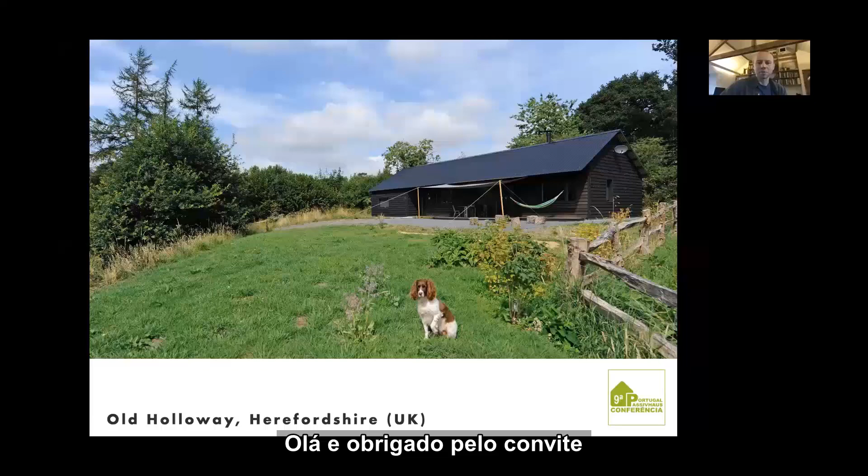I'm very happy to share our experience of designing and building Old Holloway, which is our own passive house in Herefordshire, UK. It's a project that was completed about 4 years ago, and we have lived in it since then.

Here are some basic statistics. I'm not going to go through all of them in detail, but it's a relatively small house, just under 100 square meters. Unfortunately, the form factor is not very favorable, it's about 4.6, but that's due to certain site constraints.

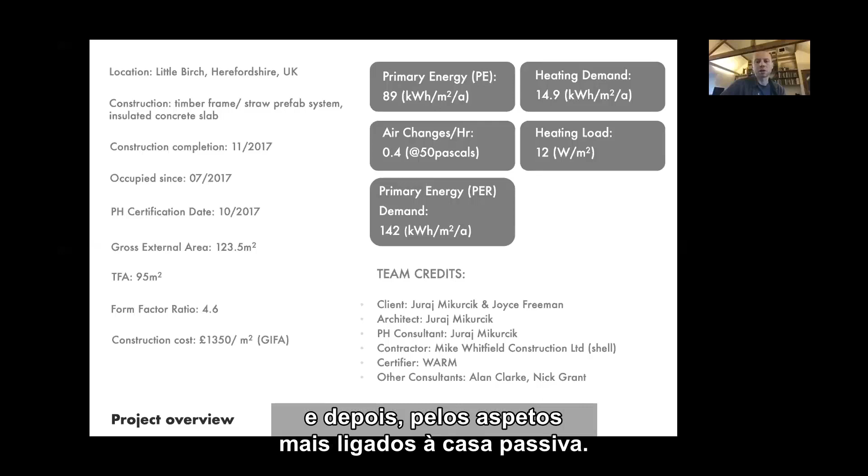I work as an architect and as a passive house designer. I was responsible for design and for the passive house side of things. The main builder was Mike Whitfield, and we also had some help from Alan Clarke, Nick Grant, and many other specialists.

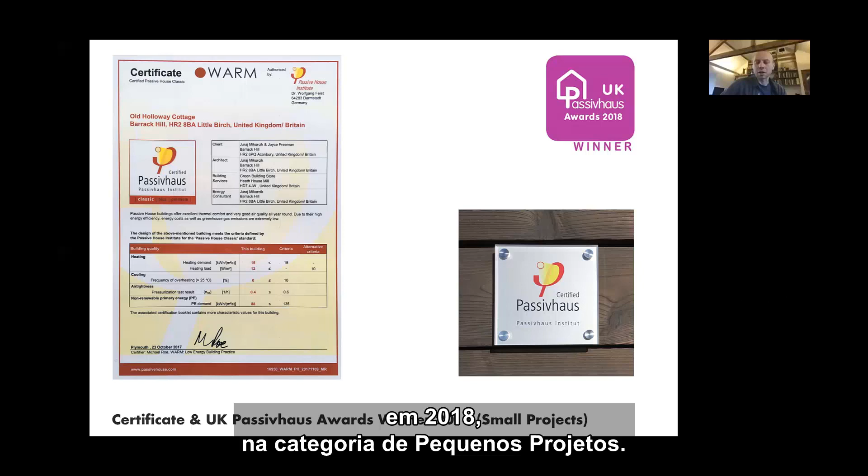Here are the passive house certificates, and the project also won the UK Passive House Trust Award in 2018 for small projects. So very briefly, it's a south-facing site.

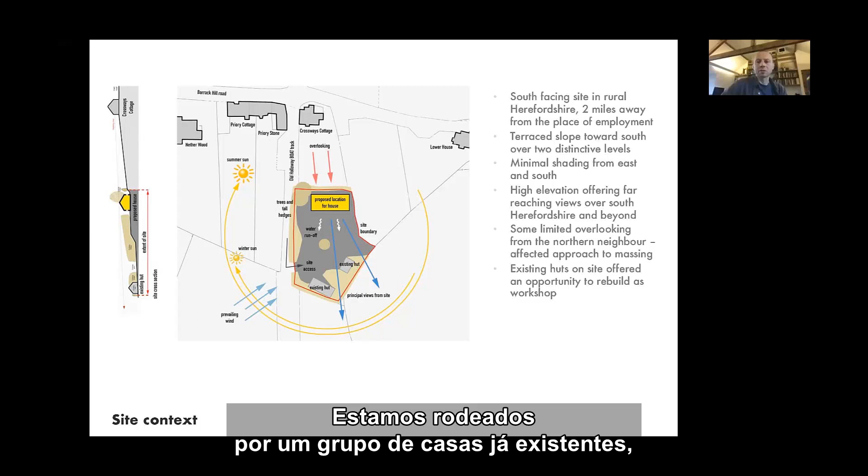It's on top of a hill. If you imagine rolling hills in Herefordshire, we are overlooking the south side of Herefordshire with far-reaching views. We're surrounded by a cluster of existing houses, but there's very little shading coming from either east or south. There's a little bit of shading on the west with some high hedging, but generally speaking it's a very open site.

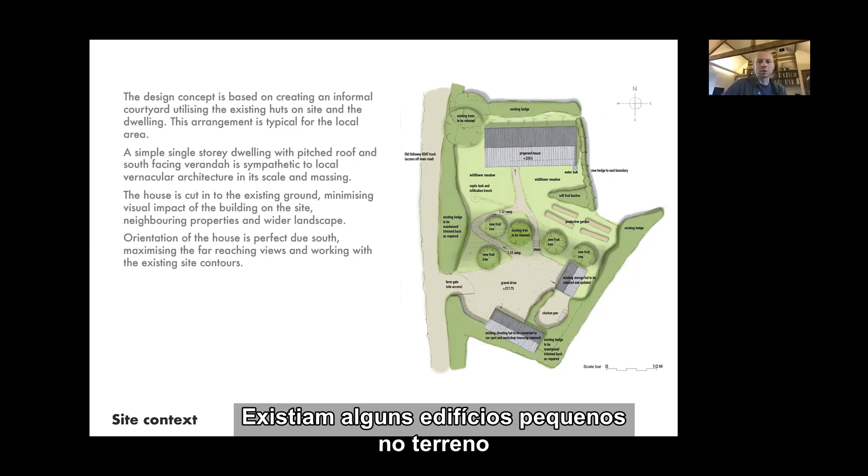There were some existing small buildings on the site before we built the house, of an agricultural nature, small huts. We decided to locate the new house at the northern part of the site to maximize the potential of the site and the views.

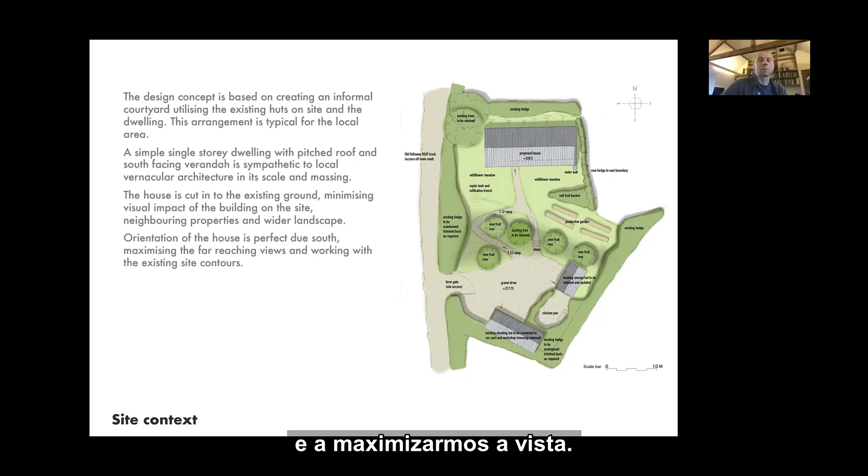We also cut the house into the ground to lower its impact on neighbors and just sit within the landscape really discreetly.

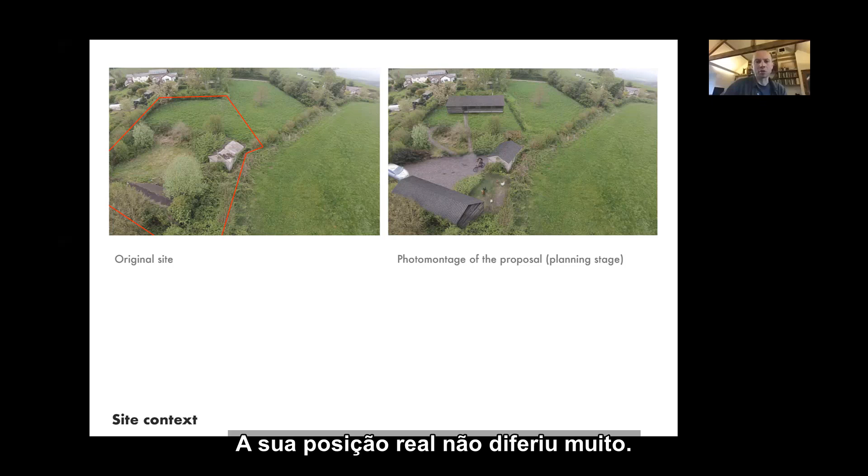Just a little bit about the design process, the massing study. We started off from a conventional two-story high house-like building with a fairly conventional pitched roof.

Then, in order to minimize the visual impact on neighbors, we dropped the massing to a single story, which meant we had to increase the footprint of the house.

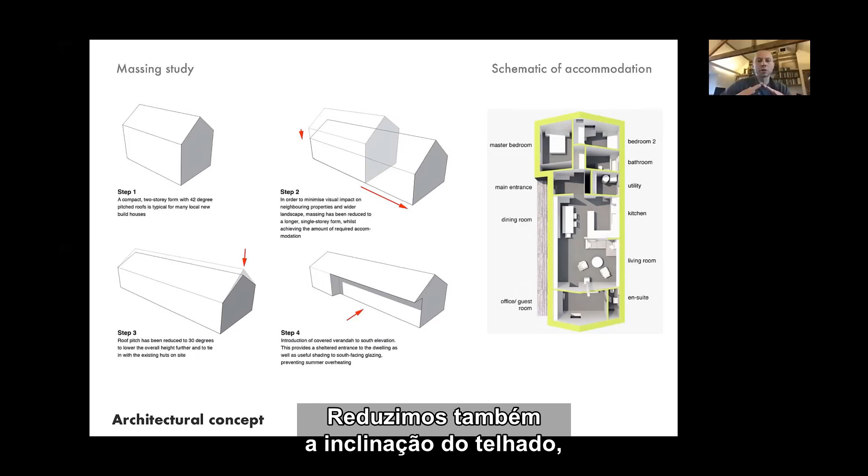We then also lowered the roof pitch further to about 30 degrees. That ties in with the roof pitches of the neighboring properties and minimizes the impact further.

And then lastly, we created this veranda on the south elevation, which provides good shading and just provides this added living space, which is external.

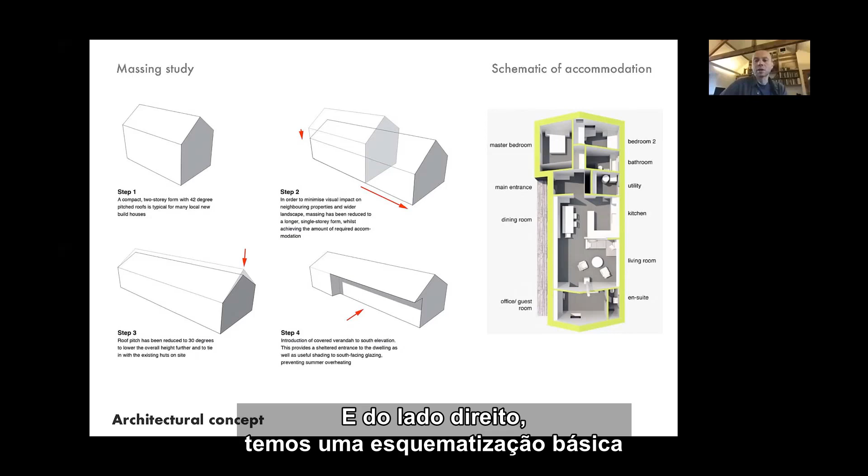On the right hand side there's a very basic schematic of how the house is designed or laid out. In the central part is very open plan accommodation - that's your kitchen, living room, and dining.

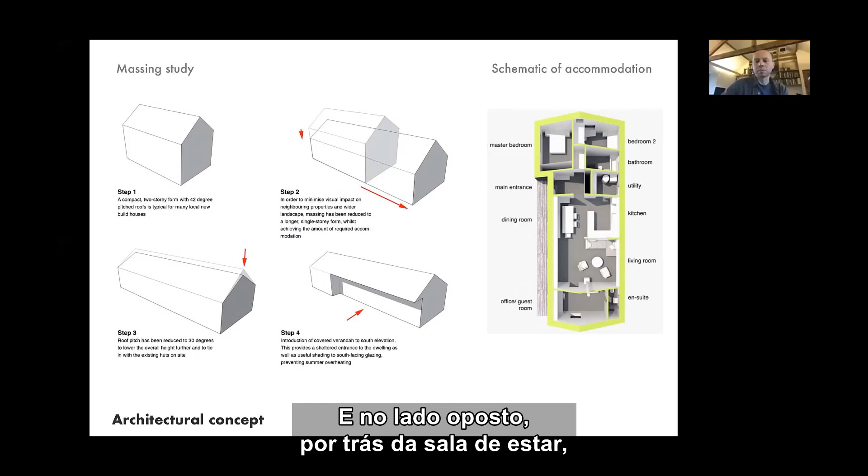At the top is the western wing with two bedrooms and the main bathroom. At the opposite end, behind the living room, there's an office or something that can double up as a spare bedroom with its own ensuite shower room.

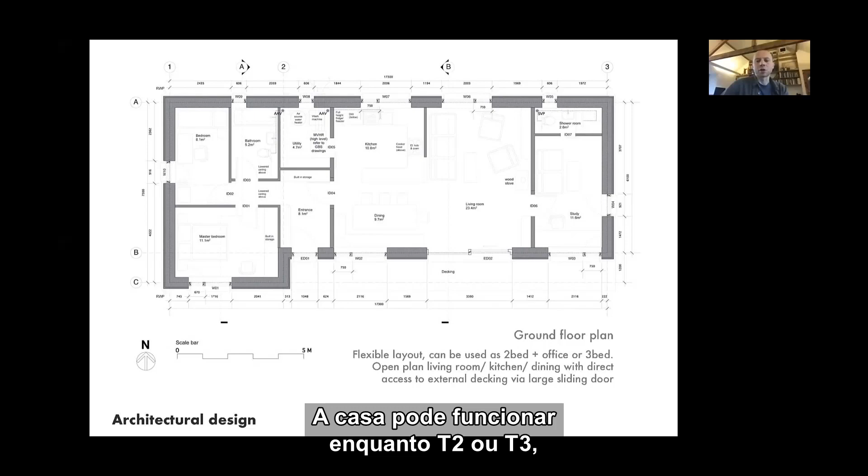Here is a larger version of the floor plan. It just shows the flexibility of the layout. The house can function as a two-bedroom or a three-bedroom house, depending on the needs of the occupants.

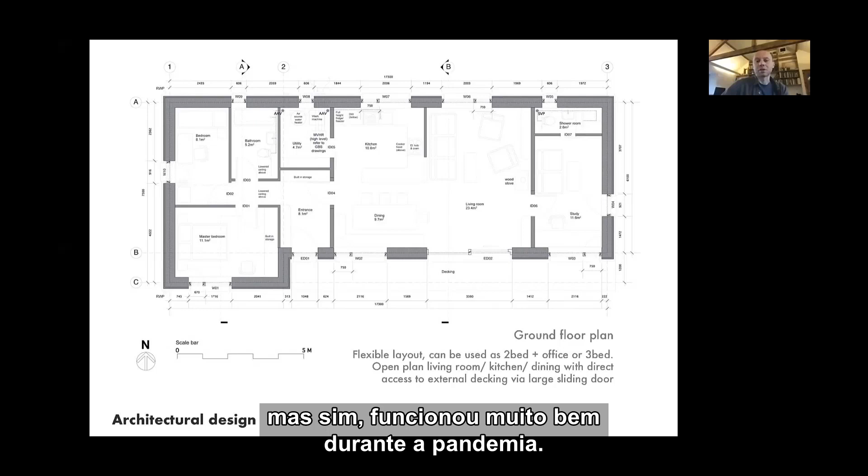I was very happy to spend the previous 18 months during lockdown in the office and worked from home - that worked really well. I'm now back in the main Architype office, which is quite nice, but yeah, it worked really well during that pandemic.

The section of the house is very simple, and we used a little trick to increase the sense of spaciousness - we opened the ceilings up, so the internal space follows the pitch of the roof, giving it a bigger volume.

From outside the house seems relatively small, but internally it really feels generous and spacious.

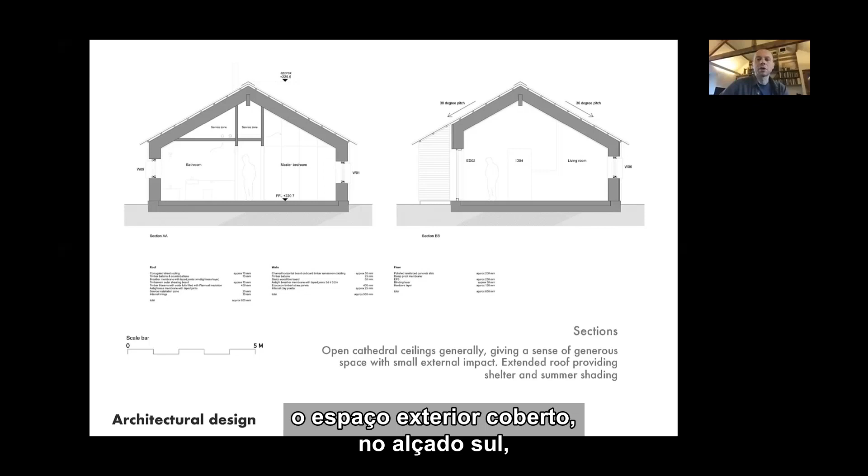On the section on the right, you can also see the covered space outside of the south elevation, that kind of veranda, which is fully shaded in summer.

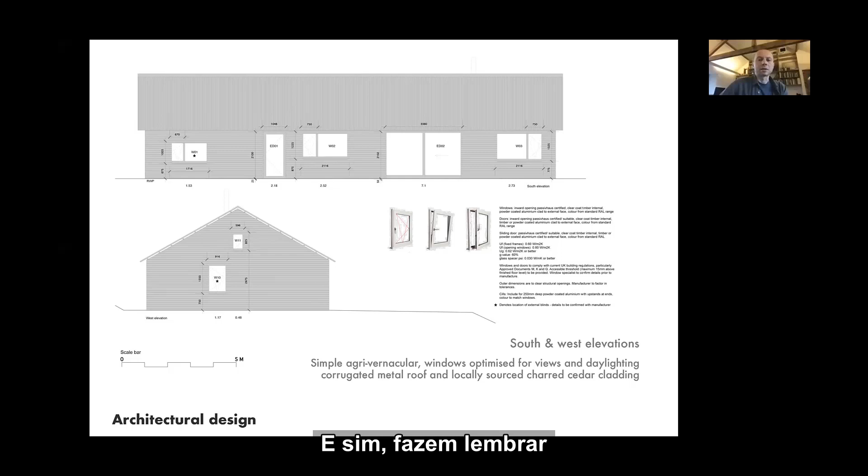In terms of elevations, we kept them deliberately very simple and used references to local vernacular, simple agricultural sheds. So the window design is also very simple. The windows are designed to optimize views and daylighting, and they sort of resemble simple agricultural buildings in the area.

In terms of materials, building materials and finishes, we kept them again very simple. So we used charred timber cladding, which is locally sourced, and a corrugated metal roof.

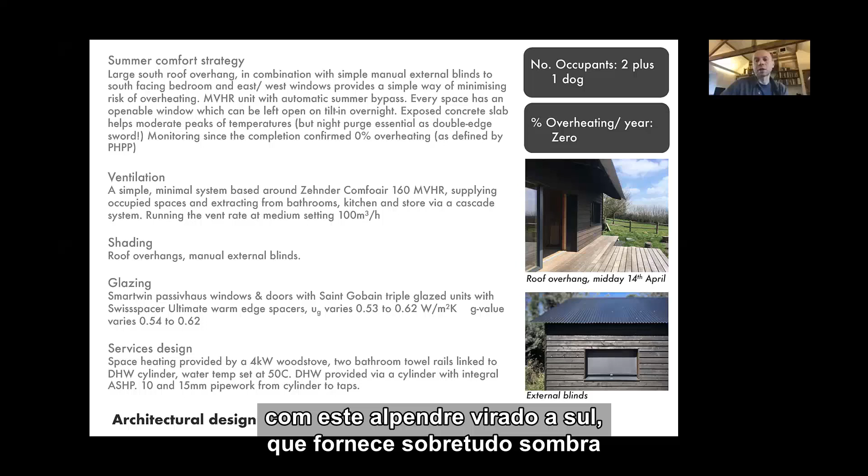Now, in terms of summer comfort, again, the design was relatively simple. We tried to design out overheating with this kind of south veranda that mainly provides the shading for the glazing facing south.

That was also complemented by some external roller blinds, which we have on 3 or 4 windows, and again, they provide good shading against the summer sun.

The MVHR unit also has an automatic summer bypass, so that helps us to keep overheating to a minimum. And also the exposed concrete slab acts as a bit of a heat battery, so it helps to smooth out the temperature peaks and troughs during heat waves.

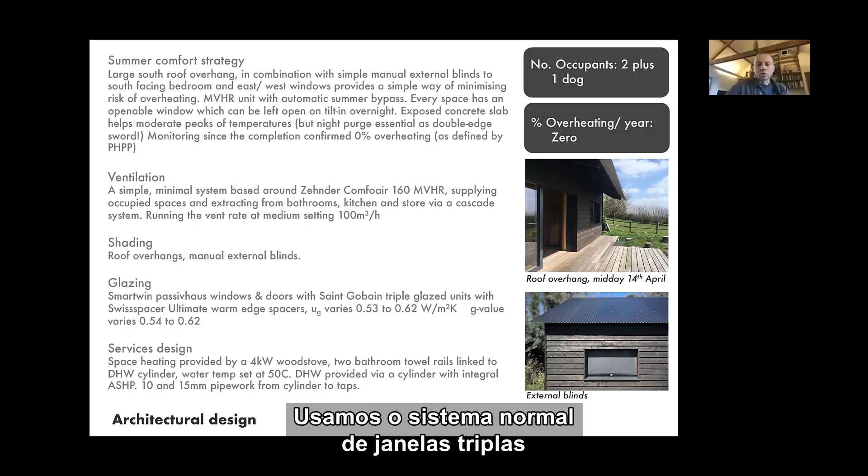In terms of ventilation, we have a very simple ventilation system based on the Zehnder ComfoAir MVHR unit. The medium rate is about 100 cubic meters per hour, and that's worked really well. The glazing is the usual kind of triple glazed system.

In terms of services design, the main space heating strategy is a wood burner. So we have a 4 kilowatt wood stove supplemented by 2 bathroom towel rails, one in each bathroom, which runs off the hot water cylinder. The hot water cylinder has an integral air source heat pump, which is a unit sitting inside a small plant room.

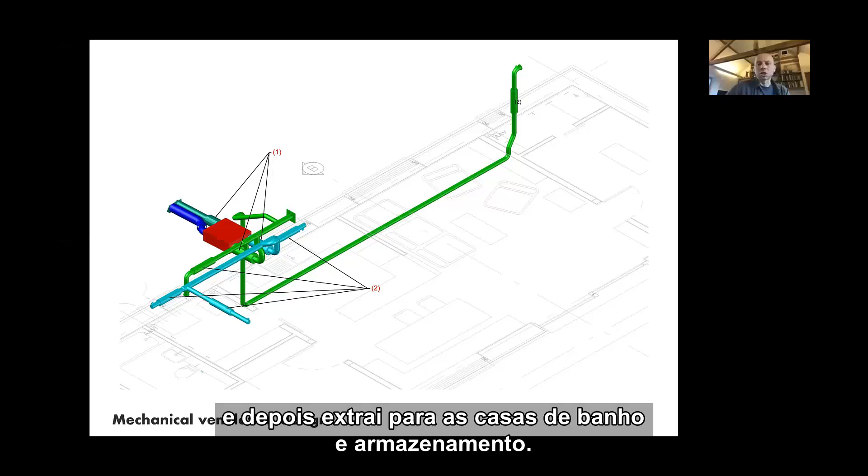Next slide is a very simple schematic of the ventilation system. We kept it really optimized and simple, so we are supplying into bedrooms and into the main living space, and then extracting through bathrooms and the store. We kept it as a very compact system.

Now we'll get into construction. So what we tried to do with the construction is use materials that have low embodied carbon and footprint.

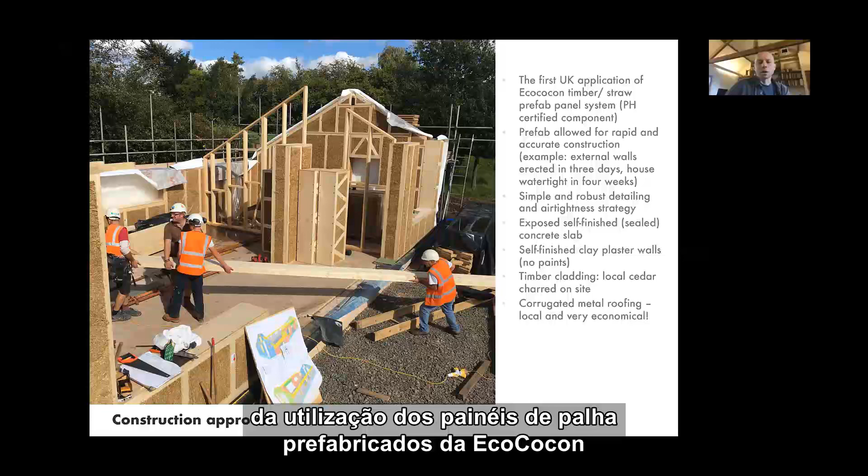This was the first example of using prefabricated straw panels by EcoCocon in the UK. It's a high performance panelized system that uses timber and straw, and it's also a certified passive house component. So we were really excited to use this as among the first customers in the UK.

And the process worked really well. All the panels are really accurate, made to measure, and work to millimeters. So the panels come together really easily, like giant Lego blocks.

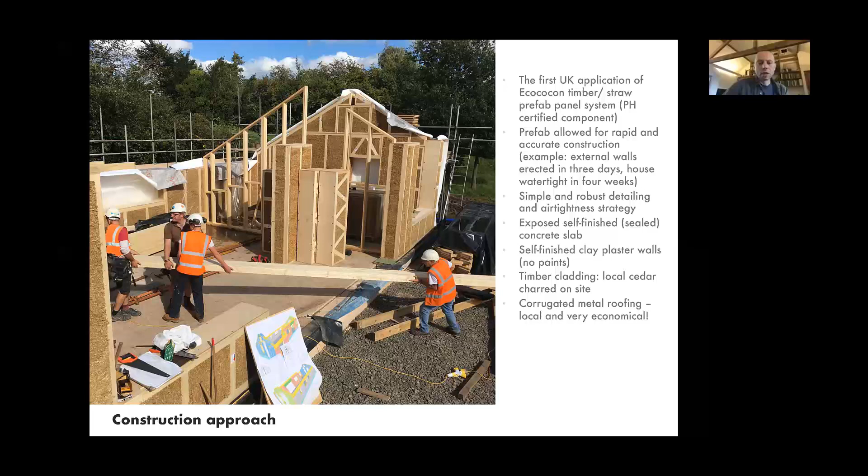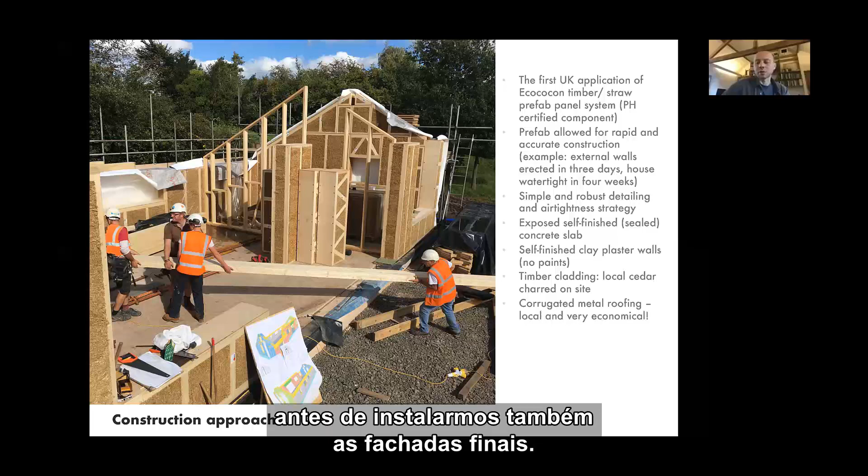We had a really simple strategy for air tightness. Basically, the walls are wrapped in an air tightness membrane from the outside, and then additional wood fiber insulation is installed before the final facade is installed as well. But we'll get on to details in a little while.

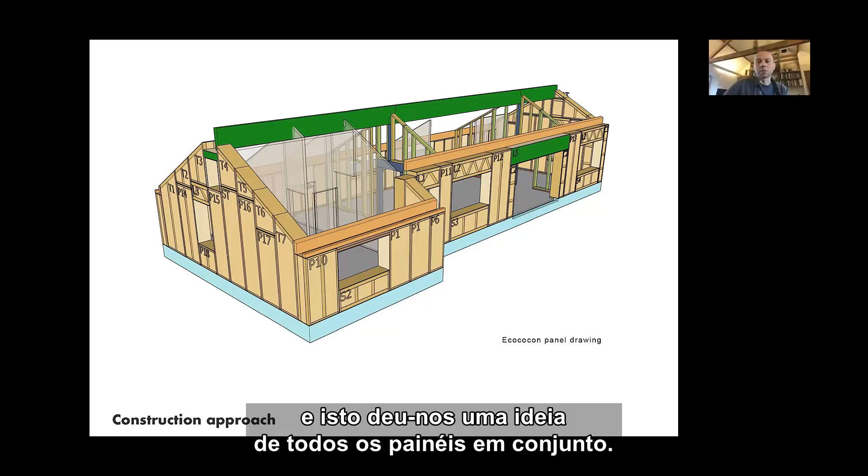This image is an example of the panel project. So basically, once the architectural design was done, the drawings were modeled and panelized by EcoCocon, and this just showed all the different panels that went together. It's a very simple and intuitive way of visualizing how the construction comes together.

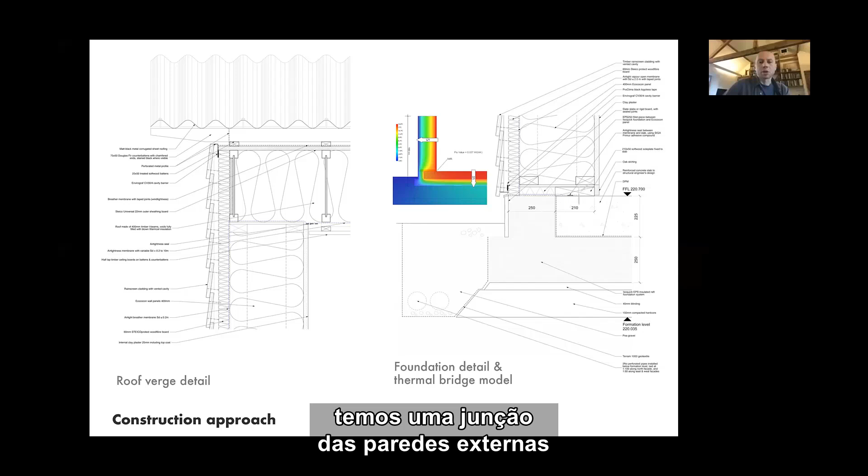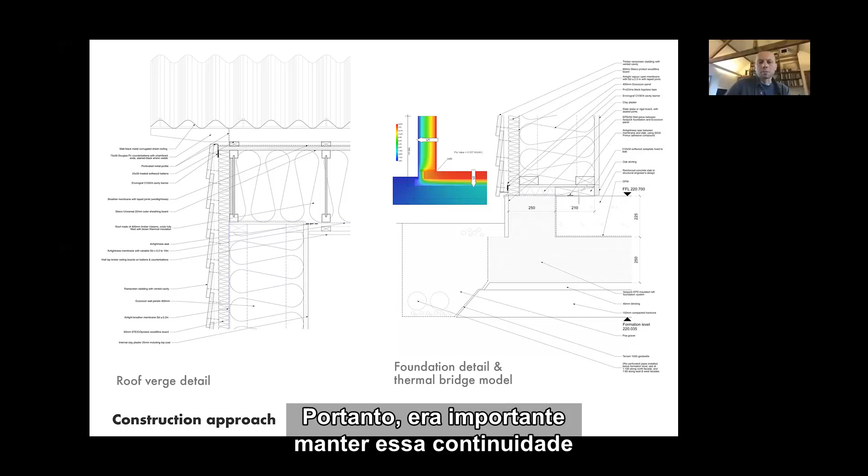Here we have a couple of examples of typical details. On the left-hand side, we have a junction of external wall and roof at the verge. It's quite interesting to see that on the external wall, the air tightness membrane was running on the outside, but then for the roof, it switched to the underside of the roof. So it was important to maintain that continuity of the air tightness layer.

For the actual roof, we used timber I-beams, and for insulation, we insulated the roofs with recycled cellulose called Warmcel, so all the gaps in the roof were fully filled.

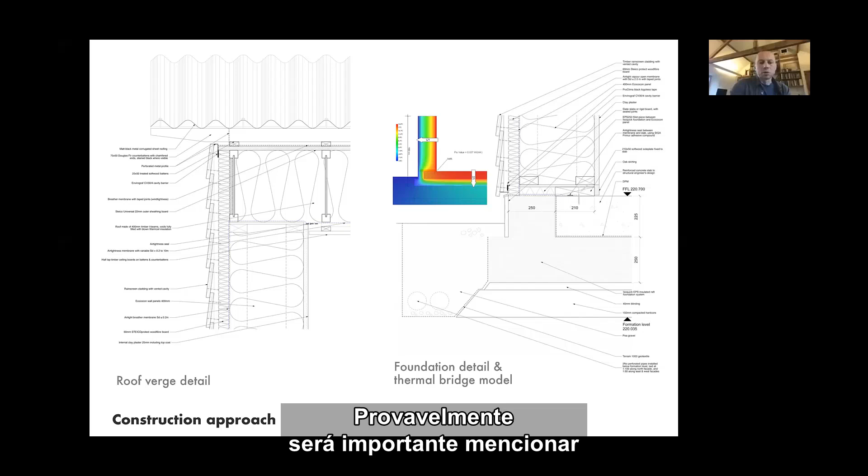It's probably important to mention the air tightness membrane for the walls is actually very vapor open with a really low SD value, so there's minimal risk of condensation in those walls.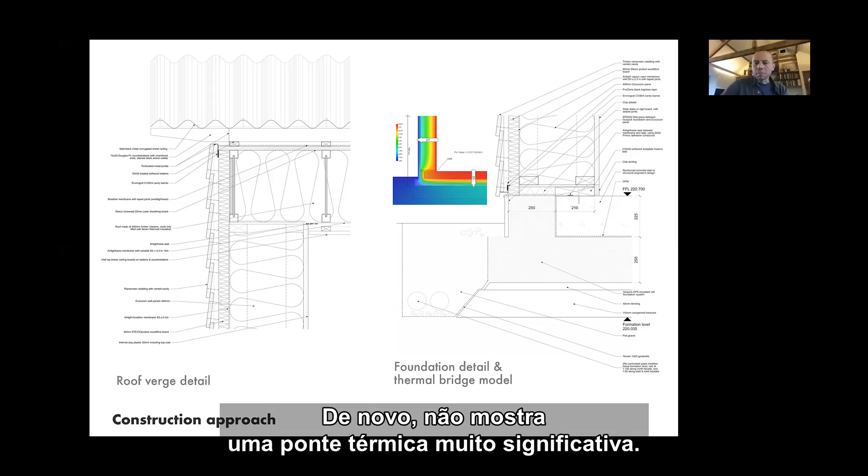Now the detail on the right-hand side shows the foundation detail. The straw panels are sitting on the edge of insulated concrete foundation, again showing no significant thermal bridging there.

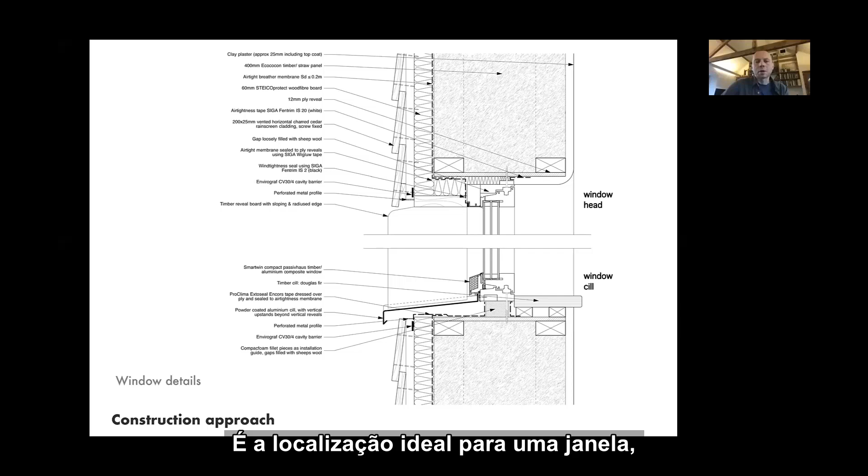Here we have a typical window installation detail, again showing how we minimized thermal bridging in that installation. We positioned the windows approximately in the middle of the wall assembly, which is the optimal location for a window from a heat loss point of view. At the head and the window jambs, we wrapped the window frames with wood fiber insulation, which minimized the heat loss even further.

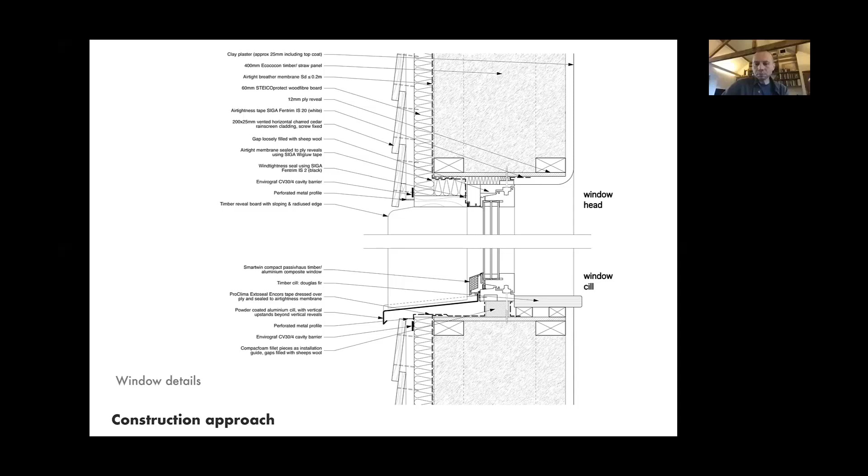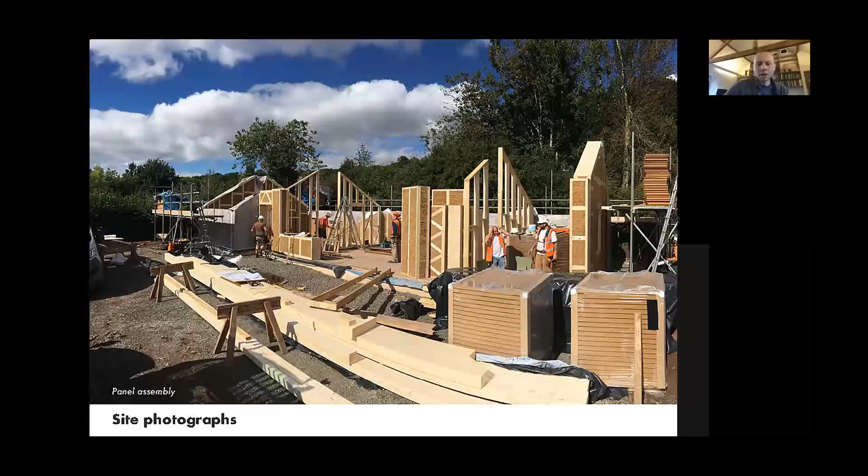Then the concrete slab provided us with a good base for building the straw panels, and the external walls went up really quickly. I think all the walls went up in 3 days, and the roof took another week or so. So for us it was really great to have the building weather tight within a short period of time.

Again, that detail was achieved with almost zero thermal bridging, but it was all part of the really detailed planning during the design stage.

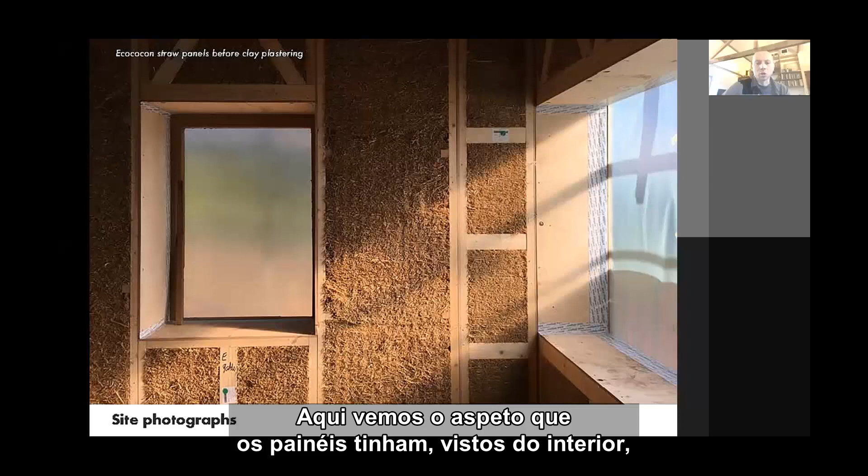Here we see how the panels looked from inside during the build. It's actually one of the great advantages of this system, that it's a very dry system. There were at that point very few wet trades, so it was really nice to work in that environment during construction.

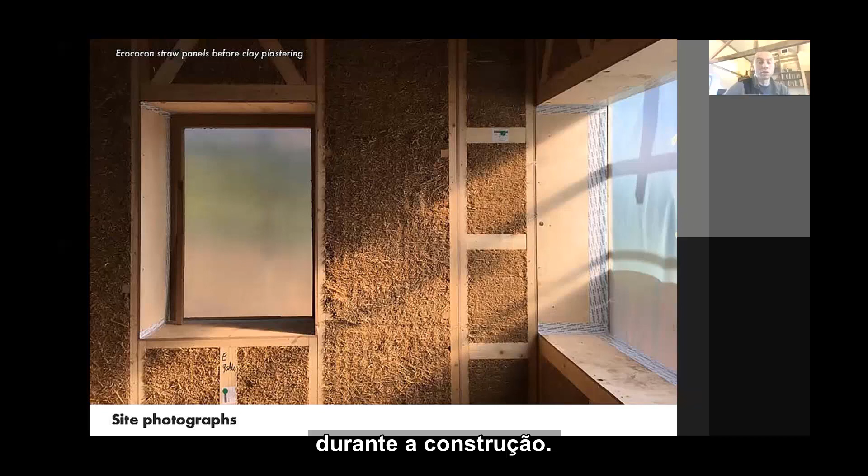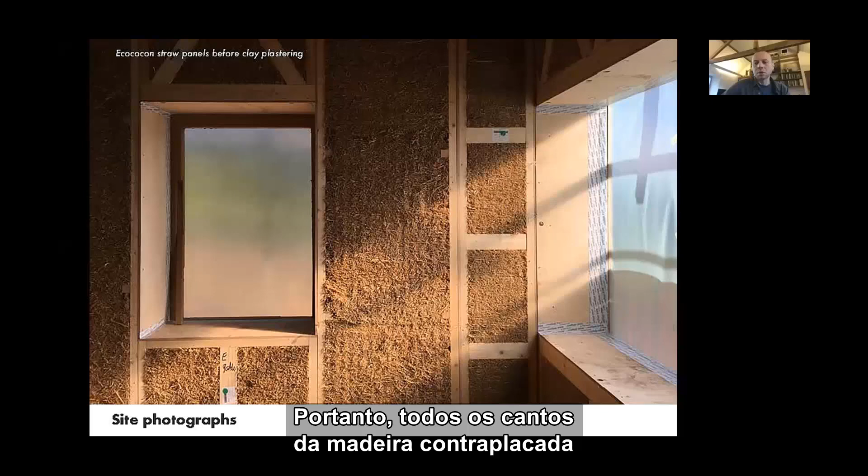On this photo, you see the plywood boards around the window openings, and those were also part of the air tightness strategy. All the corners in the plywood were taped before the windows were installed.

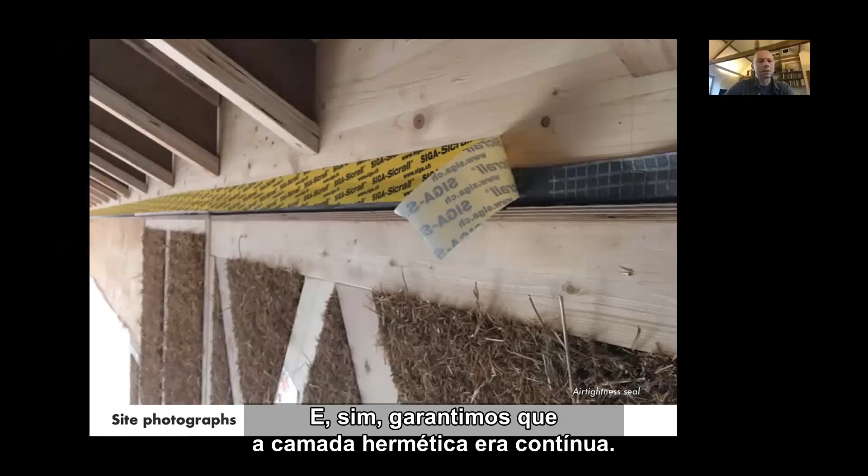This shows a junction between walls and the roof, where the membrane from outside is switched to the inside, then taped onto a glulam wall plate, and later a membrane was applied to the underside of the I-beams. So we made sure that the air tightness layer is continuous.

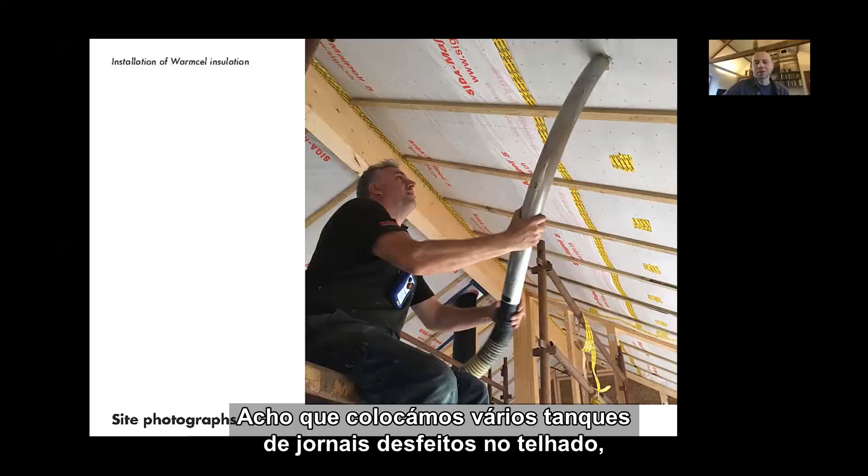This is just some pre-taping of windows before installation, and insulating the roofs with recycled paper. That was quite fun, I think we had many tons of shredded newspaper in the roof, which is keeping us nice and cozy.

Obviously, as on every passive house project, we had to do a couple of air tightness tests, and we passed quite comfortably. This is the first air test we did once we had all the windows in, and all the air tightness was taped up and achieved. The first test achieved about 0.4 air changes per hour.

You can see in the picture a very small fan that was installed within the window, rather than usually a larger fan being used in the door.

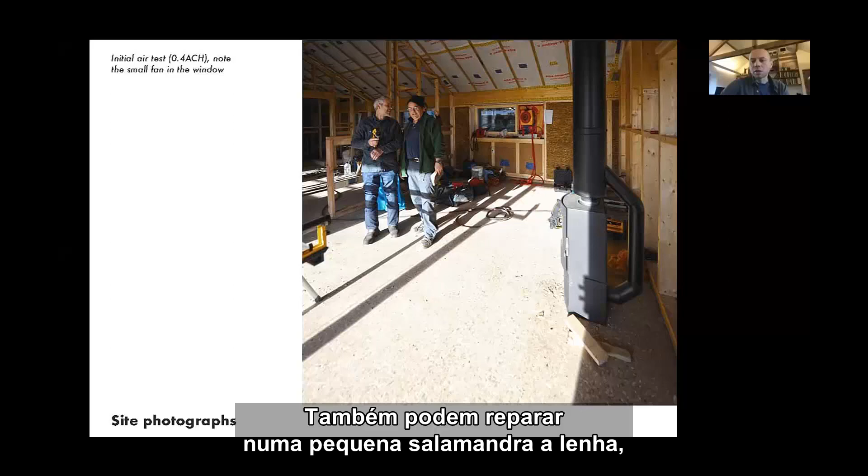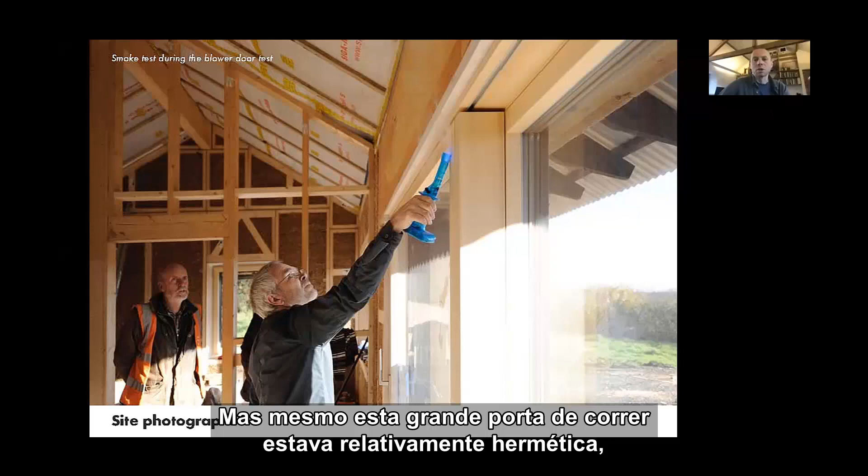You'll also notice a small wood stove here in the corner. That was one of the weak points in terms of air tightness, because inherently it is a penetration through the air tightness envelope. But even the large sliding door was relatively airtight, so there were no major air leaks through that, as we've shown here with a smoke test.

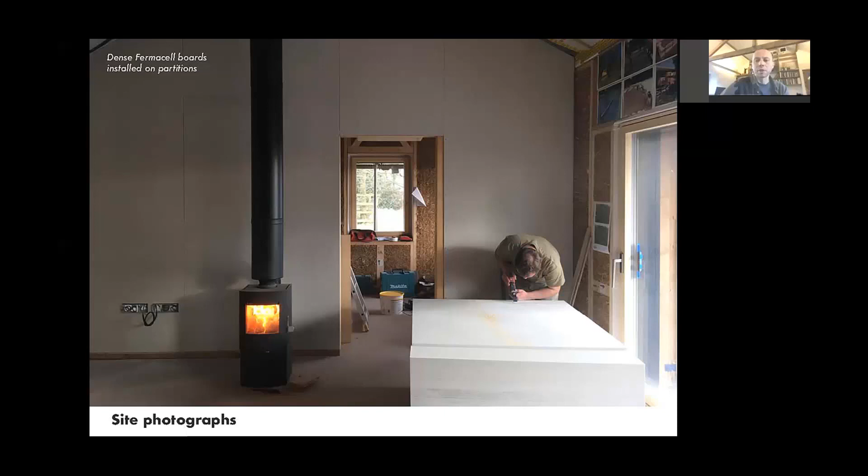Then we carried on with installation of internal partitions. We added really dense plasterboards called Fermacell, which helped us achieve more thermal mass in the house. Obviously, straw being quite lightweight, we tried to put a bit more density into the construction.

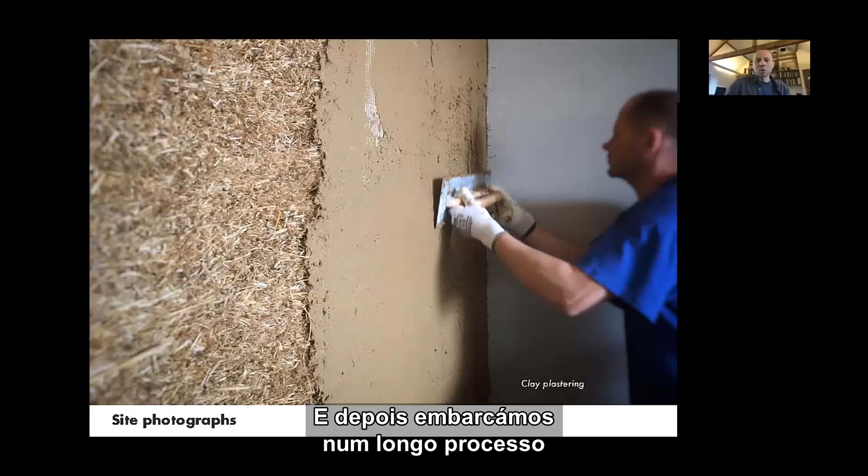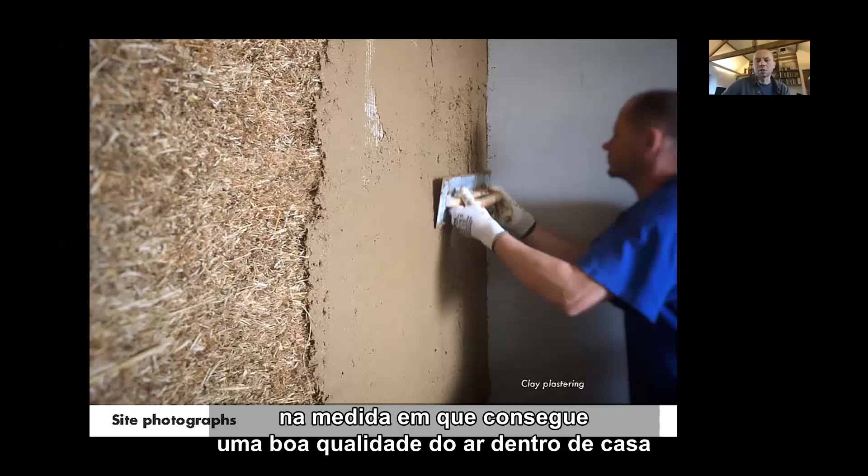Then we embarked upon a long process of clay plastering all the straw panels. Roman from Slovakia was an excellent plasterer, and we spent about 7 weeks applying several layers of clay plaster onto the straw walls. This really provided a great finish that's low toxicity, very natural, and doesn't need painting. It's a great combination with straw in terms of achieving good air quality inside, and this feeling of solidity as well.

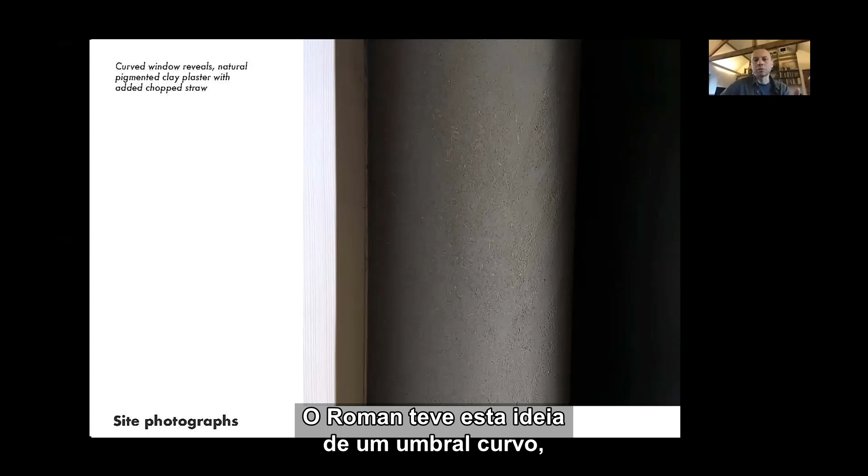And this is a finished corner. Roman came up with this idea of a curved reveal, which really gives it a nice sculptural form, and the finished product there.

Then we obviously had to commission the ventilation. Nick Grant and Alan Clarke came around to commission the ventilation system, which was great, and it's been running really well since then.

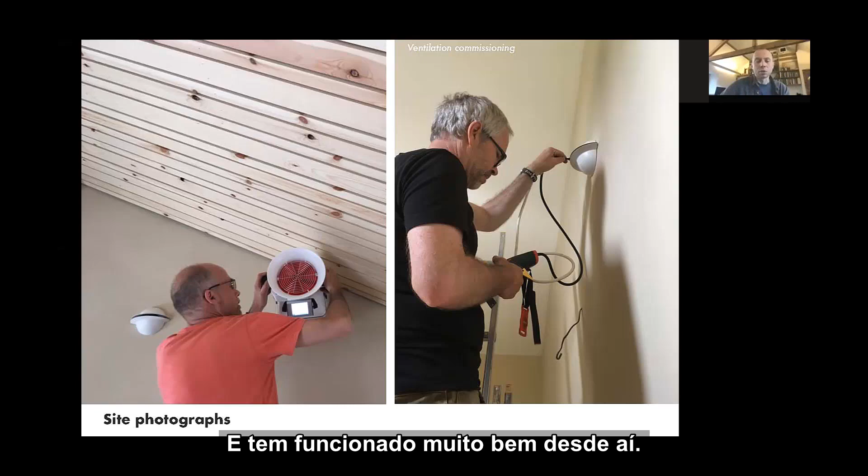We also had fun charring the cedar cladding on site, although it took quite a long time to do. I think the final effect was worth it.

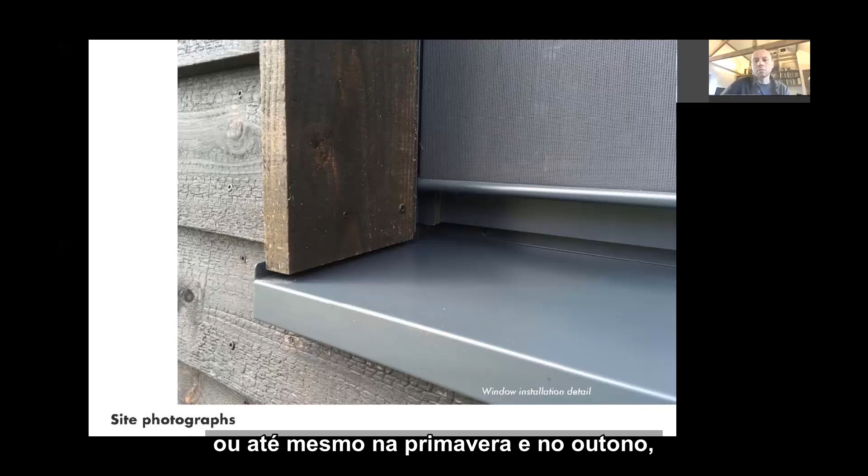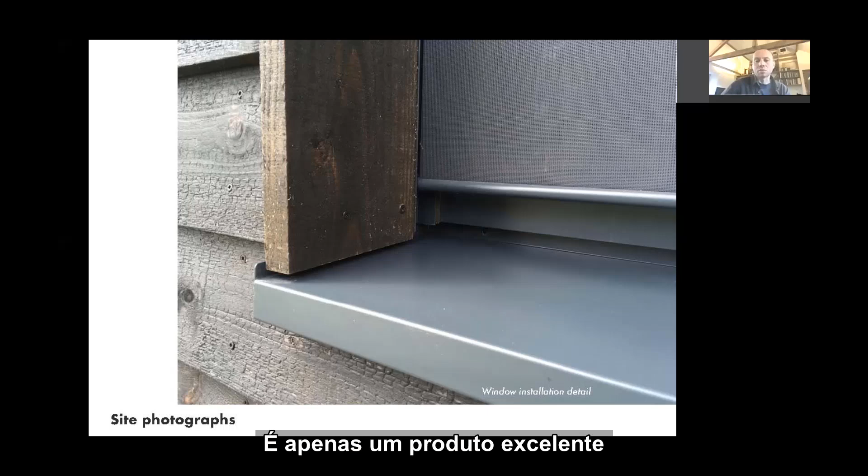Here we see a large scale detail of a typical window installation from the outside, and this includes an external roller blind, which we use during the summer months, or even spring and autumn when it's really sunny. The great advantage is that it also acts as a bit of an insect screen, so we can leave the window open behind it. Yeah, it's just a really good product and good concept.

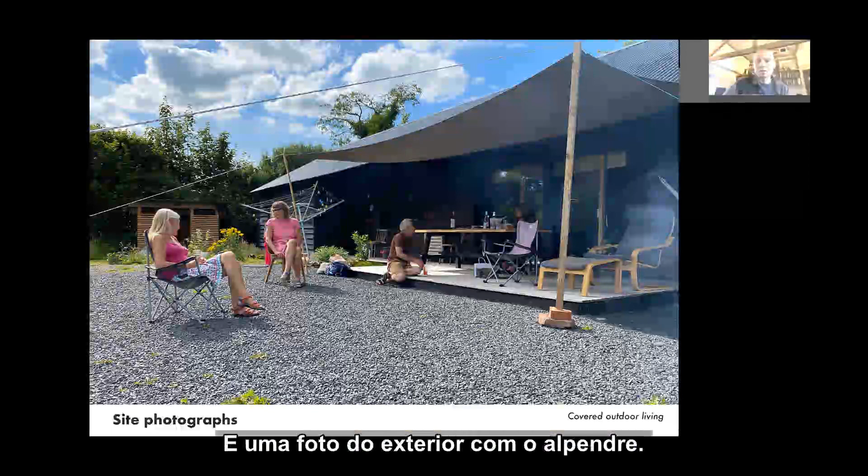Just a photo of the exterior of the veranda. Sometimes in summer we extend the covered space with this kind of external sail, and that just provides an extra bit of shading for the timber decking. It doesn't provide any more shading to the interior, but it's just nice to be sitting outside with friends.

Just a few more interior shots.

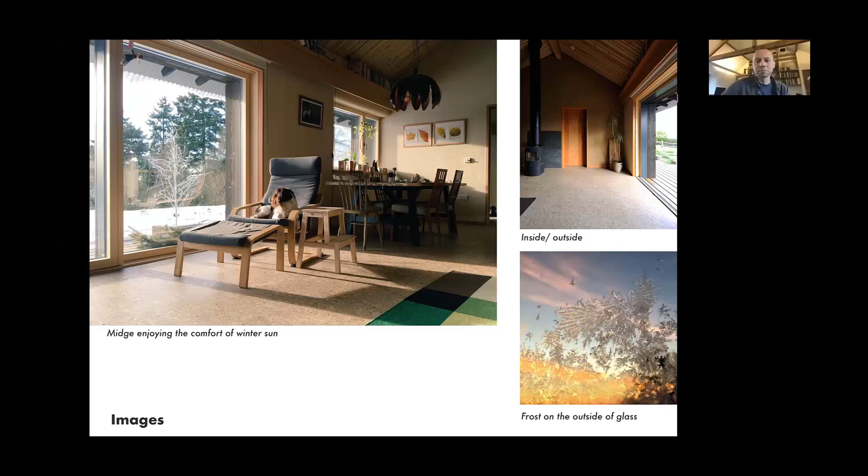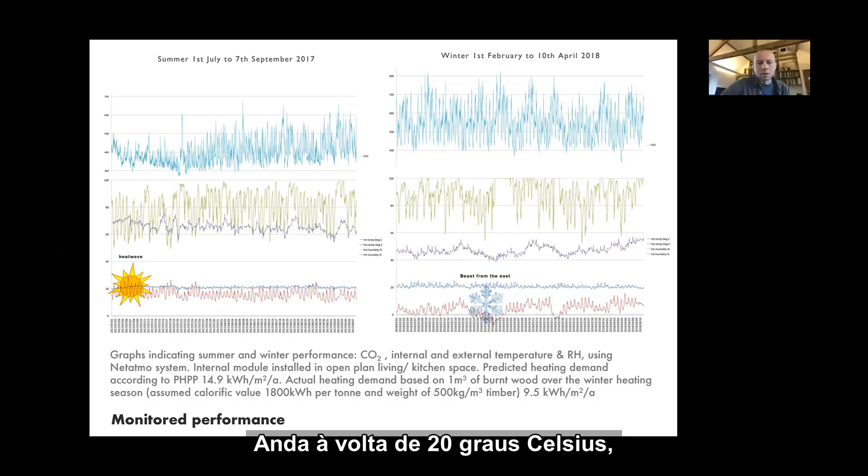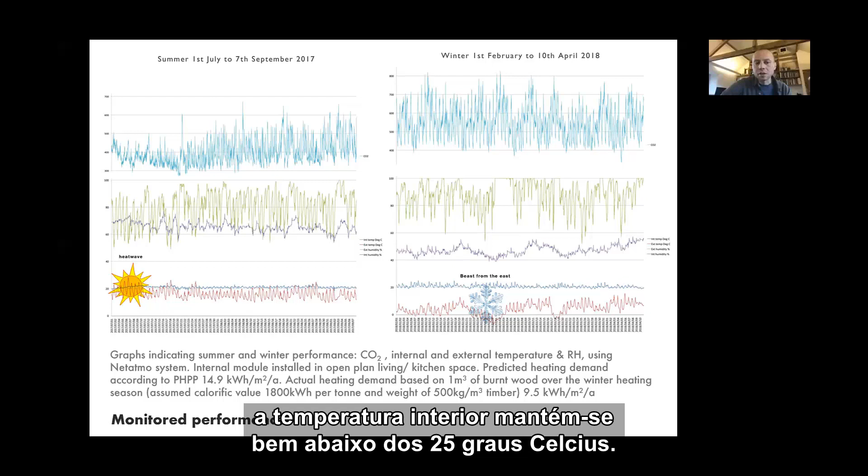The graph on the left shows the summertime. The graph at the bottom is the interior temperature, hovering around 20 degrees C even during the heat waves. The blue line is the inside temperature, the red line is the external temperature. So even with temperatures nearing 30 degrees, the inside stayed well below 25 degrees C.

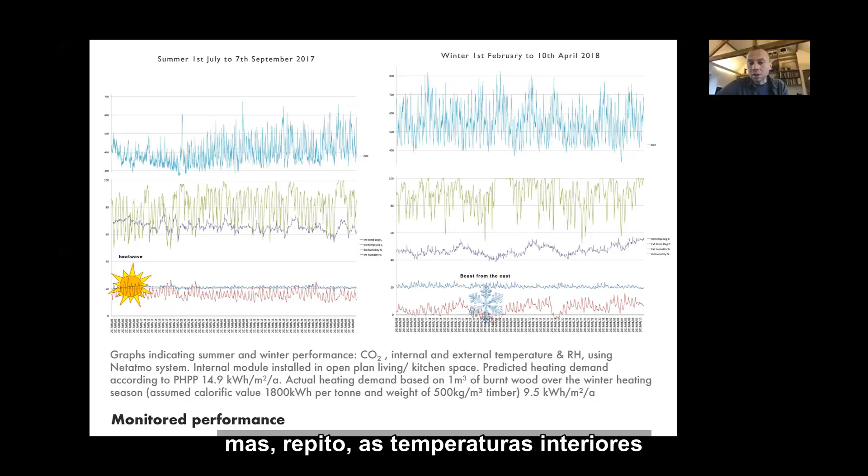Then the graphs on the right-hand side are from wintertime during the Beast from the East. Again, the red line is the external temperature. For a period of about a week or 10 days, it went well below zero, which is quite unusual for the UK. But again, the inside temperatures barely touched or changed during that period, fluctuating just above 20.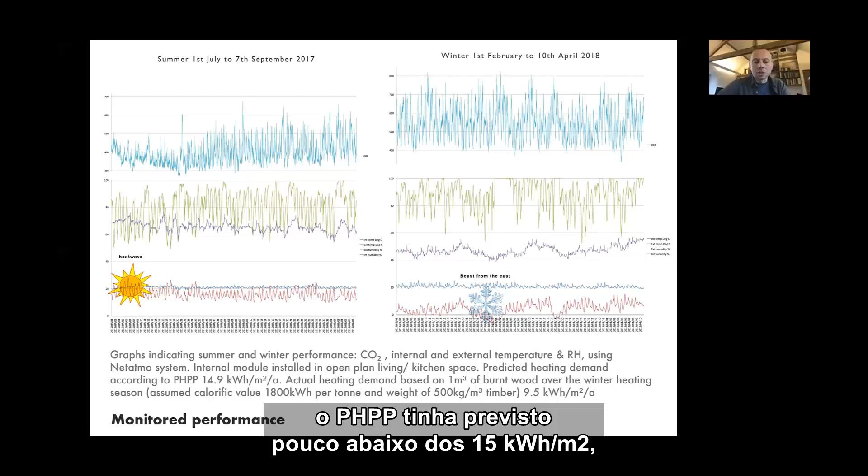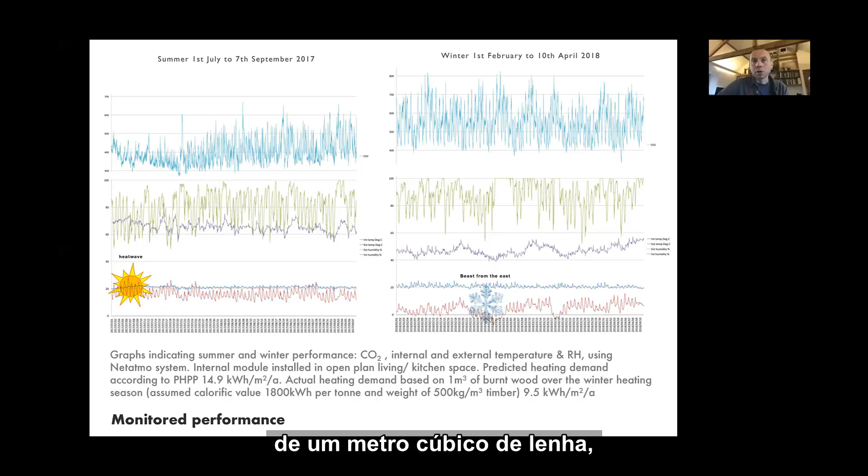In terms of the heating demand, the PHPP predicted just under 15, but the actual heating demand, based on the wood we burned over that really cold winter, came to about 9.5 or around 10 kilowatt hours per square meter. Just for comparison, last winter we burned a third of a cubic meter of wood, so it would be even lower than that.

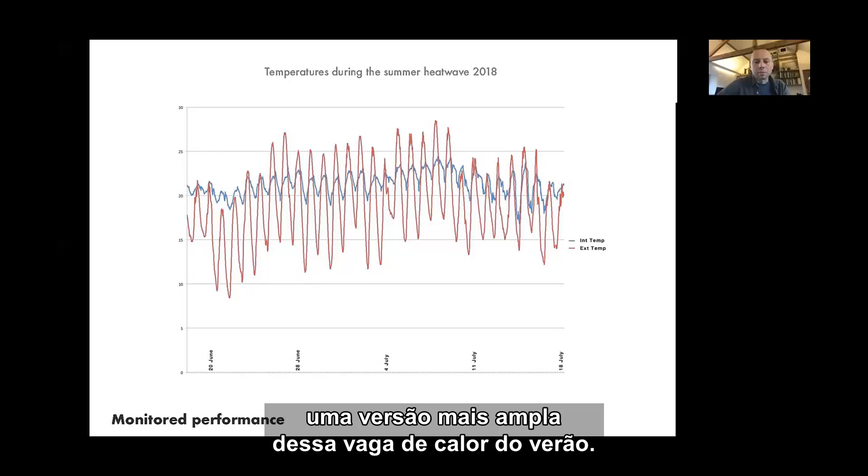I'll come on to the question of the wood burner in a short while. This shows a larger version of that summer heat wave, again showing the external temperature in red and internal temperature in blue. So, very stable conditions.

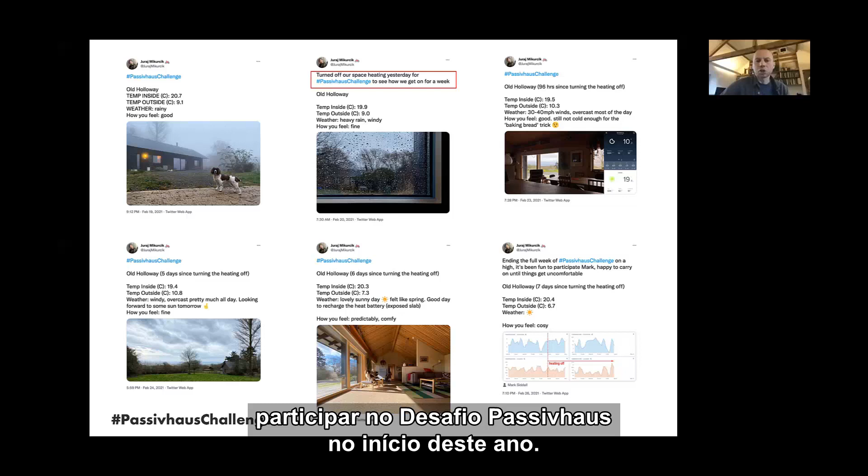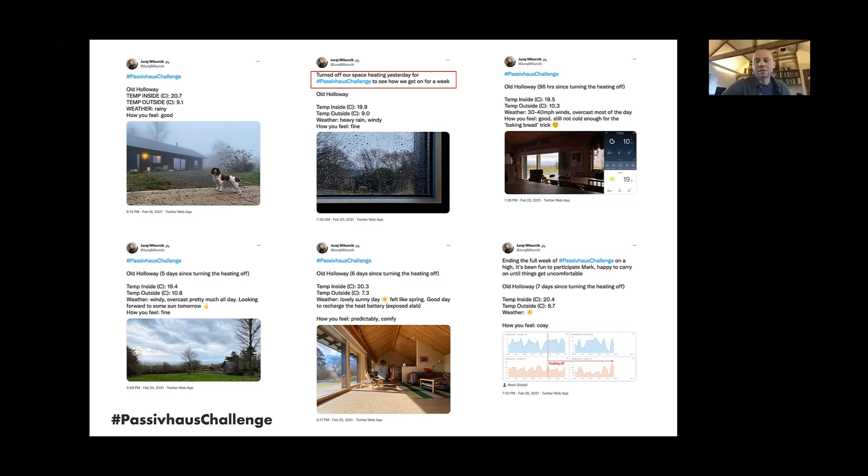It was also very fun to join the Passivhaus Challenge earlier this year. Mark Siddall from the UK on Twitter started this fun little activity, asking residents of passive houses to stop the heating for a week and see what happens. A few people on Twitter joined this campaign, and it was quite fun to see how the house would actually perform over that time. In the end, it was really easy to stay there without heating for a week. It started on the 19th of February, when we turned the heating off.

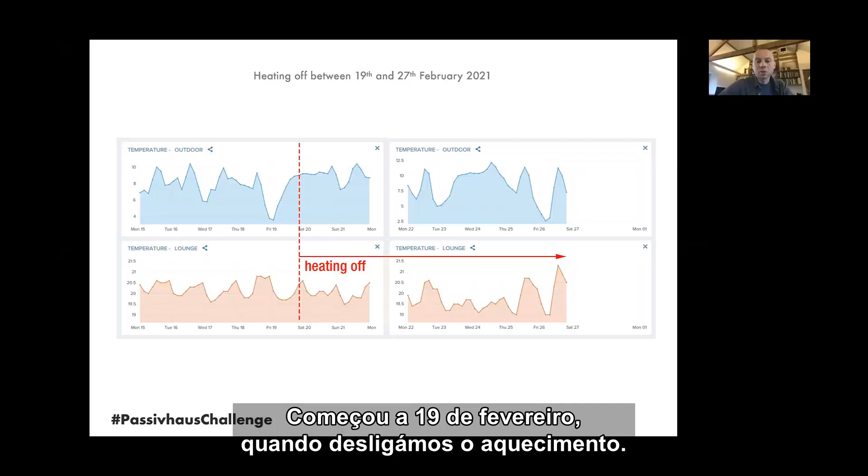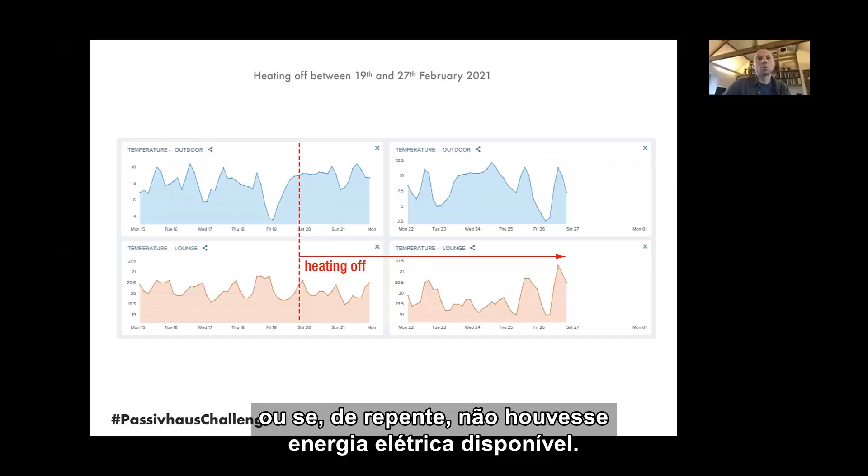Outdoor temperature was relatively mild, anywhere between about 4 and 10 degrees outside, but inside temperature hovered between about 19 and 21. So again, it just showed that Passive House is very resilient - in terms of power cuts, if suddenly there was no power available, we'd probably still be okay for a while.

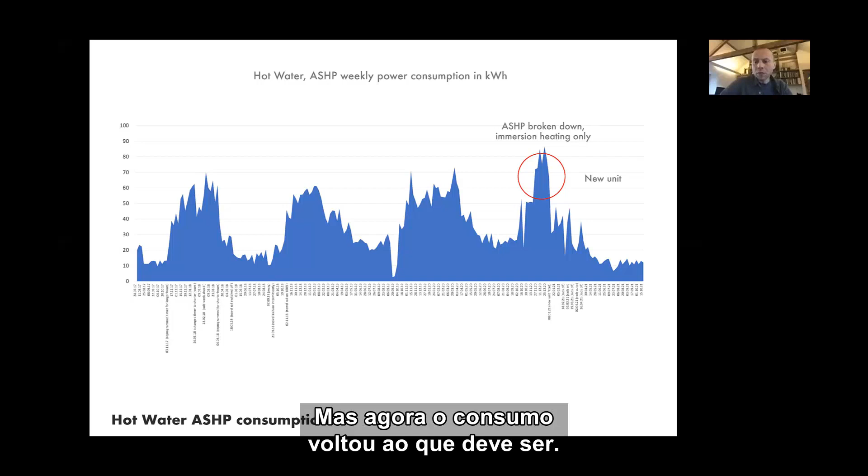Our original air source heat pump did malfunction last winter, so it had to be replaced. As you can see, for a short while we just used the immersion heater, and the consumption went really high. But now the consumption is back to where it should be - around about 10 or 12 kilowatt hours a week, which is really good.

Here are just a few thermal images, trying to find any cold spots. But as you can see, the hottest and coldest things are things like the television and a cold bottle of beer in the house. So very happy with how the system and the building has been constructed, with almost no significant thermal bridges.

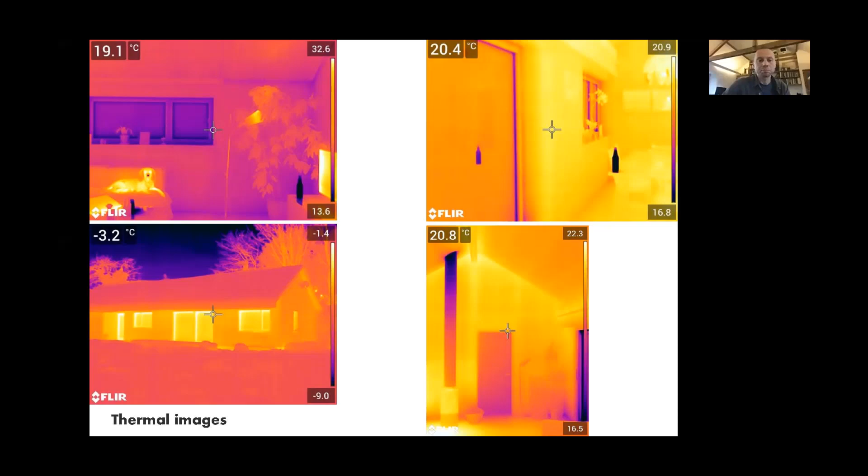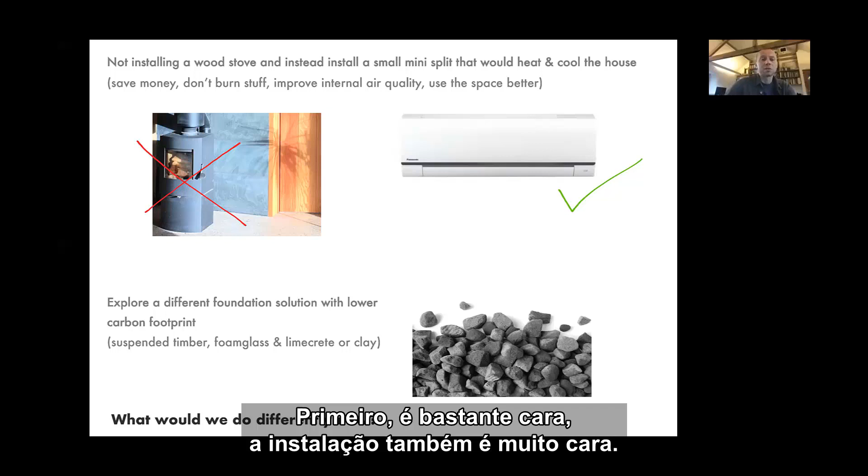João, you asked me to include things that we would probably do differently. Now we've lived in the house for 4 years, I think it's become clear that the wood burner is probably not ideal for us. It's quite expensive - it was quite expensive to put in - and we don't actually use it all that much.

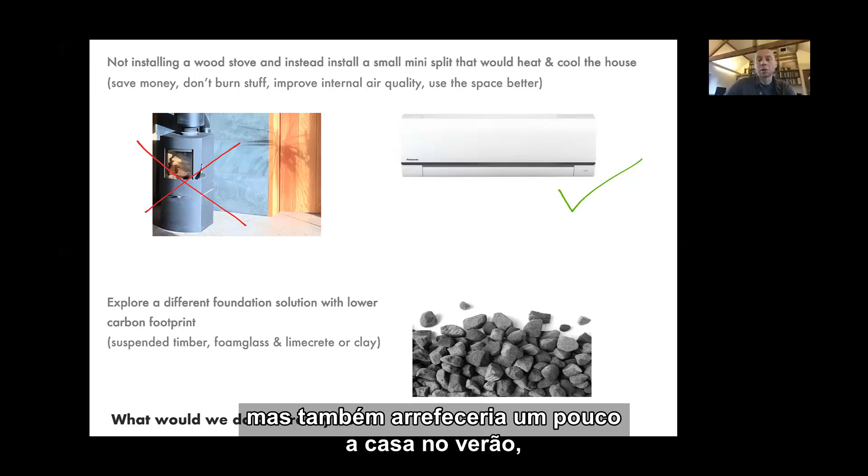So if we did it again, we probably wouldn't install it, and instead we would put in a mini split that would supply the small bit of heating we need, but could also supply a little bit of cooling in summer, just to improve comfort. We could also use the space better that's currently occupied by the wood burner. I think wood burners are really a thing of the past that we should just forget about in passive houses, and any other houses, to be honest.

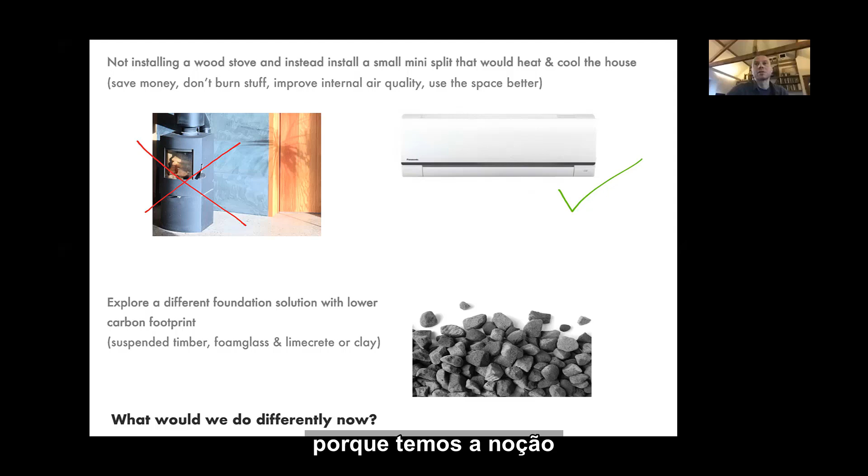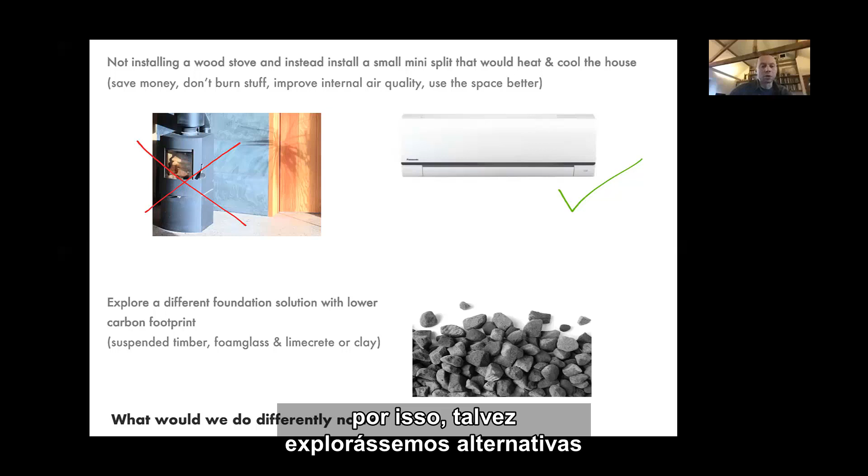The other thing we would probably look at is the foundations, because we're conscious that materials have a carbon footprint. With the straw panels and timber roof, etc., we had quite good credentials, whereas the foundation was still quite high in carbon. So we'd probably be exploring alternatives for foundations, which could include either suspended timber flooring, or something like foam glass and limecrete, or clay floors. That would definitely be something we'd look at if we were building the house again.